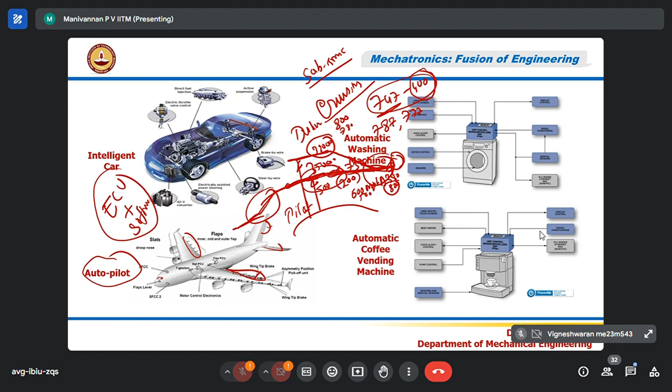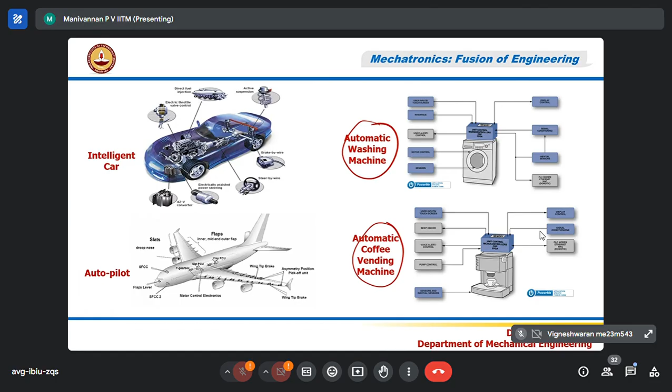Example for mechatronics: the washing machine, we will see that. Then automatic coffee vending machine, we are going to see in detail, so I'll just skip. You can see a lot of sensors, actuators, all these things are there. Mechatronics is there everywhere, as I told you, wherever you see.

This robot can dance, walk, do all these things, but the main purpose is not for that. They are trying to replace human workers with a humanoid robot. It has, you can say, exactly like a human finger, hand, all those things, so it can work tirelessly.

A human operator, after a few hours, you go to your company, after a few hours you get tired, correct? Nothing wrong in it. Even I come to office by 8 o'clock, by 12 o'clock I get hungry, I am teaching class, I lose energy. That's why there's a break. For your company also, you go and eat food, relax for 1 hour, come back and start working. By evening again you will become tired, all those things. By the time it's 8 or 4:30, you go. That is a human, no other option. All living things, when they start working, lose energy, they become tired.

When you are tired, you make mistakes. If in a production line you may have to assemble some component, you may wrongly assemble it, or not tighten some bolts or nuts. If you are a design engineer, you may make some small mistake which is not noticed, and finally when the product comes out, this happens. The major drawback is human, but to avoid that, they wanted to use robots.

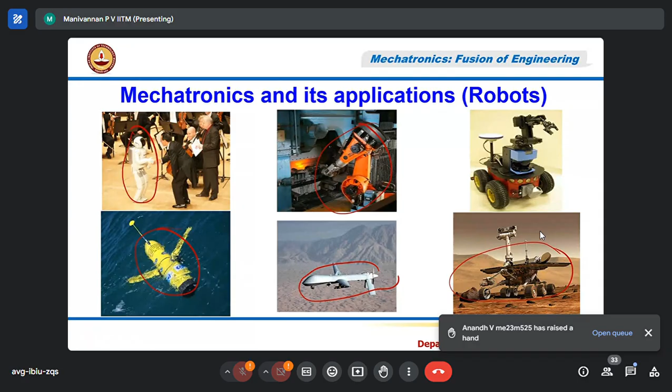Pilot is safe, but in regular fighter planes, F-16, F-20, whatever, including Tejas, MiG, what we are using, you need a pilot, manually controlled. This is autonomously controlled, this is an example. Please note that the robot need not be in humanoid shape. It can be humanoid shape, underwater robot, this is industrial robot, this is generally called, this is also robot. A machine which can do something on its own is called a robot, correct? So these are examples for different types. These are all mechatronic products.

Again, we see about mechatronics, example is autonomously guided vehicles, we call AGVs, in the airports or in the shop floor. In your big machine, you go to a big automotive company, maybe you may be also using, I don't know, for example Tata Motors car factory, or Mahindra in your factory, not in R&D center. So for moving the items from one location, generally you have a forklifter, correct? Forklifter will be driven by a human driver, he should know that. These days, an AGV is also driving inside the factory in a predefined path.

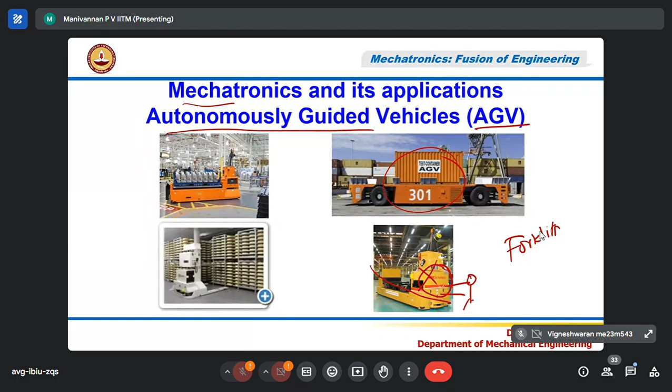It has a lot of sensors to see if some person is coming in front of it. There's a sensor which measures this, and the vehicle will be stopped. Please note that there's no driver, everything is done autonomously, like a self-driving car. So this AGV is also an example for a mechatronic system. It has engine, it has wheels, it has electric motor, correct? The steering system, braking system, all these things are controlled by a computer. So it is a mechatronic system example.

Then mechatronic means it does not necessarily have to be there. It can be a robot, for surgical robots, teleoperated surgical robots, this has become very popular. One of the most popular, one of these, is ZEUS. This is ZEUS robot, right? It has 4 hands, and with 4 hands it can pick up different tools to do a surgery.

Please note that in this, the surgeon, this person is a doctor, a highly accomplished doctor, sitting in New York in his hospital, and the patient is in Strasbourg, France, on the surgical table. This person is lying down, and they have to do a major surgery. That experience is available only with this doctor who is in New York. Generally what happens? The doctor should fly from New York to Strasbourg.

It takes 1 day of travel, at least a 10-hour travel, after airport and all those things, you will do the surgery. Next day again you go back. How many? 1 surgery, surgery may take 2 hours, a complex surgery 3 hours. But traveling 1 day, going back another day, totally there's 48 hours.

But your effective utilization is only 2 hours, remaining time is wasted. Instead of that, now you have teleoperated surgery, ZEUS, surgical robot as they call it.

The patient will be anywhere. There's a video camera on top that takes the picture, and you see that picture. In the robot hand also, there's a very close-up view picture. There are multiple cameras. The doctor can see using his joystick, like a video game, controlling it.

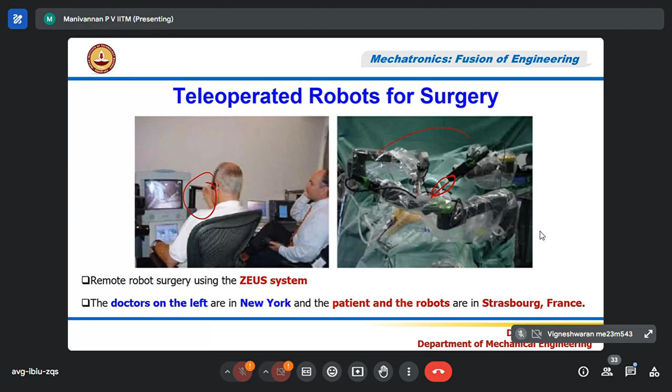So this surgical robot is made of mechanical links and joints. All these things - so it is a mechanical structure.

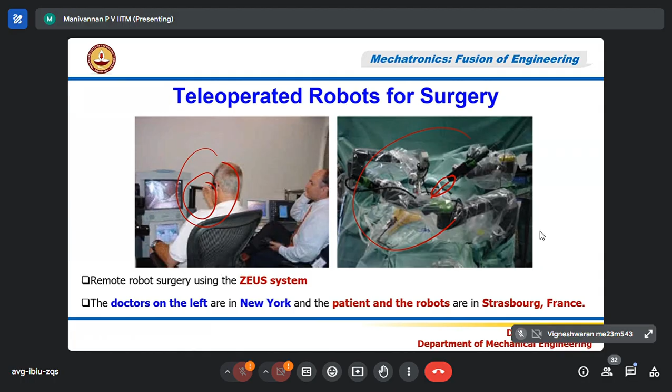As I told, autonomous car, self-driving car - it has a lidar, it has a camera, it has a radar. Using that, it is seeing the road.

They follow equal distance, called inter-vehicle space, and if this vehicle is going 60 miles per hour, all vehicles go that speed. If the vehicle applies brake, all vehicles apply brake. So they call this a platoon. Main advantage is no accident with the computer control, highly efficient.

All this thing, when we come to talk about autonomous vehicle, that time you will understand. But of course, in 2023, they know what I am talking about. Everything, they have already done the course.

It has a lot of sensors - LIDAR, camera, radar, wheel speed sensor. All these things are used for controlling engine, brake, and steering system, just like a human driver, so that the car is driven by a computer, not by a driver, without causing any accident, which is called a self-driving or autonomous intelligent car.

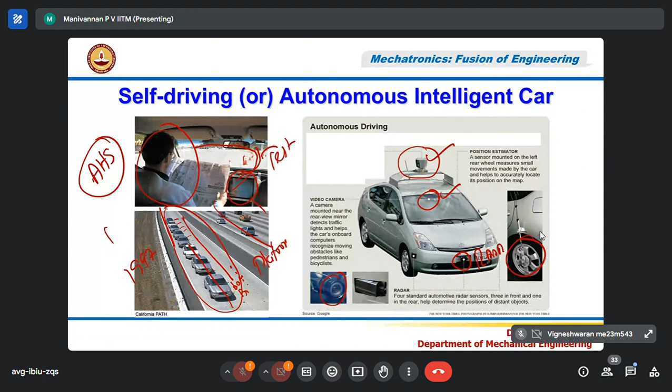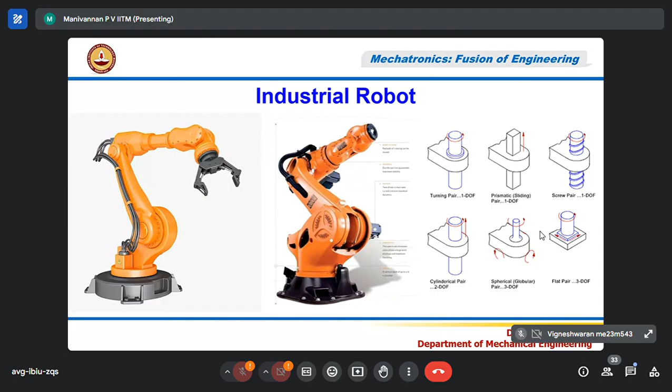Now let us see the important parts. This one example is just a few examples. We'll see about industrial robots - how it works, what components it requires, motors, joints, links, how it is all controlled.

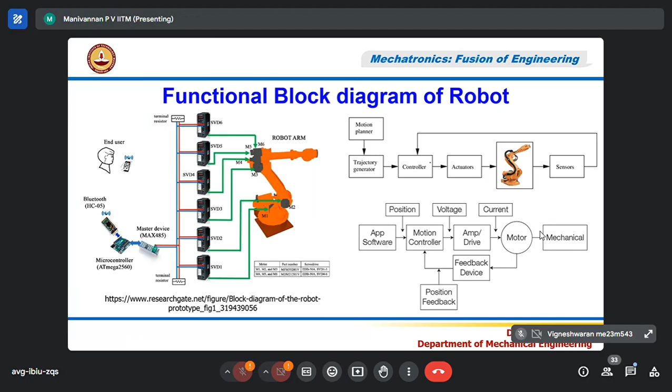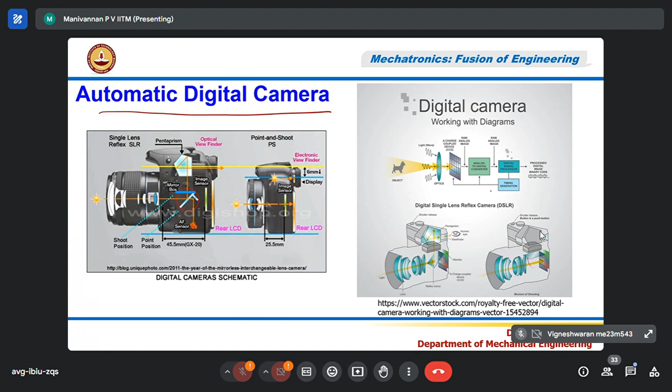Then we'll talk about the automatic digital camera - what is the internal structure, what are the sensors, what are the motors, how it automatically adjusts the focusing. All those things we'll talk about.

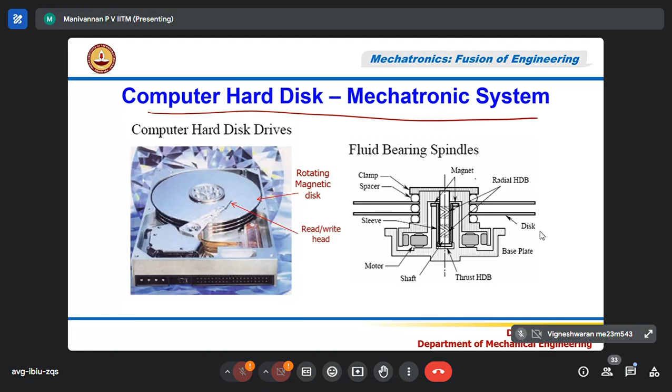Another example, in detail - computer hard disk also is a mechatronic system. We'll talk about what are the different components and how it works, and its advantages. Then we talk about washing machine.

Washing machine - this is the cut section view. What are the important mechanical parts and how it is controlled. There's an ECU, electronic control unit. There are amplifiers, signal filter, all those things. It has a lot of sensors, 4 different sensors - it can vary to 5, 6 depending on the model you are purchasing. Automatic washing machine, and it has an actuator.

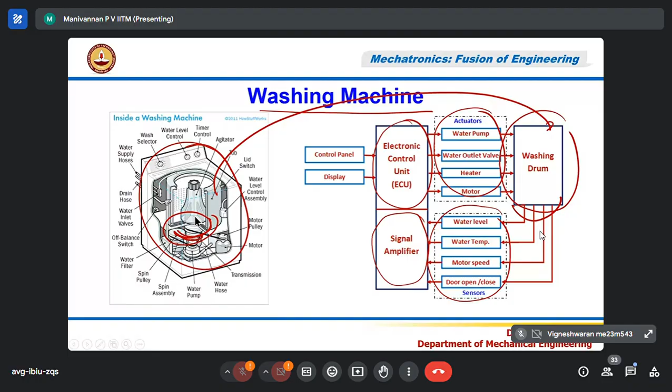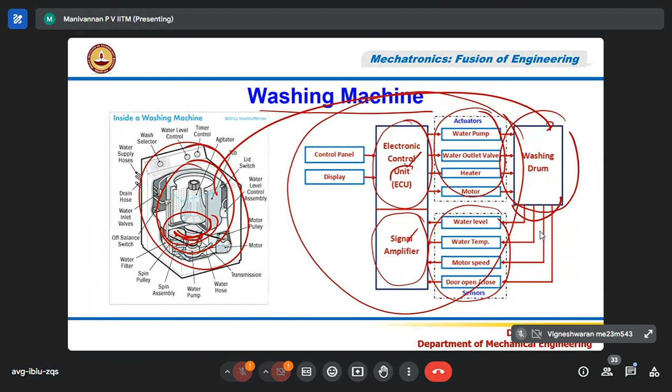In any mechatronic system, you will have a mechanical system - this is the mechanical system, inside this is the drum. This drum should be rotated clockwise, anti-clockwise during washing time, and during drying time it will be spun at 800 or something like that. So this mechanical system is controlled by this electronic system - this is the ECU hardware, the signal conditioner, these are actuators, and there's a control program inside that controls it. We will see about that.

Then we also see satellite attitude control. You know satellites are used for communication purposes - cell phone, TV, all those things.

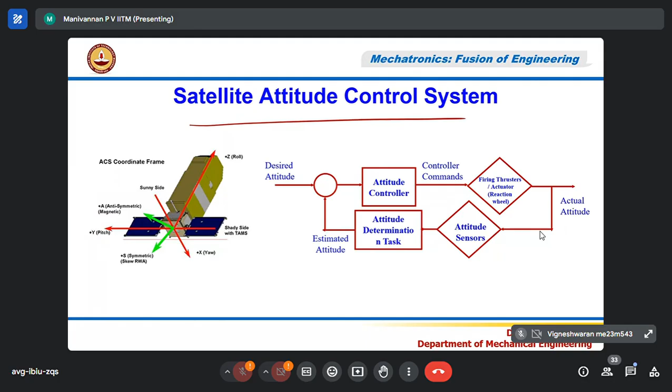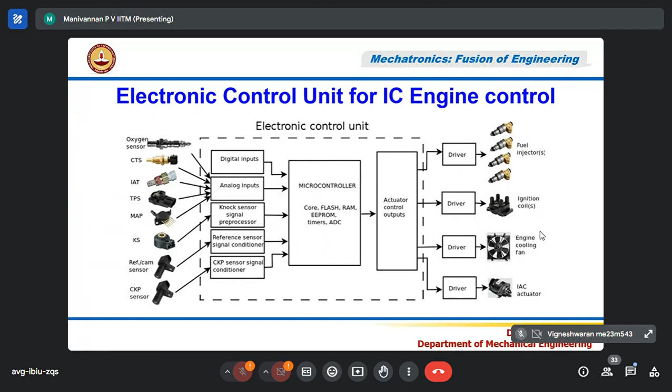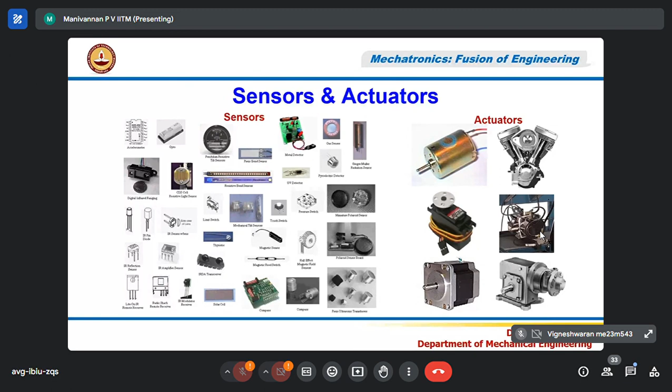They are all to maintain. What it is, examples we'll talk about. Finally, we will talk about IC engine. Already I talked about how the IC engine control also is a mechatronic system. That example we are going to see. Then we'll go detailed into this one. Tomorrow we are going to see another 1 or 2 classes. We'll see these parts. After that, we'll jump into more about what is embedded control, what is this, all these things. I'll stop here. See you tomorrow.